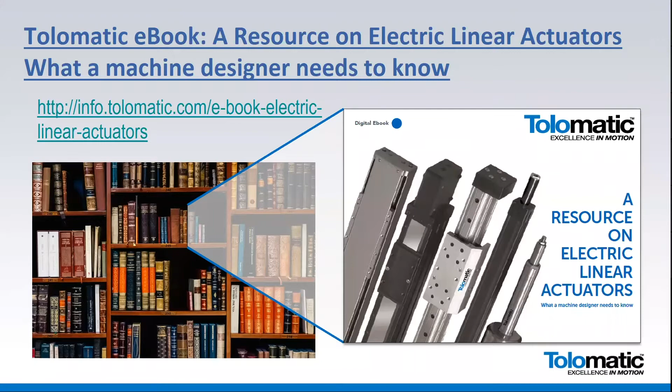Go to the next slide, Teresa, and I'll introduce Kenny Green. Kenny's been with us for a few years now, hailing from Colorado. Kenny, take us through selecting the right actuator.

Thank you, Andy. So part of the process of selecting the right actuator - one of the first steps you'll want to take is choosing between a rod style and a rodless actuator style. The main difference between these two is visualized in the pictures on the left. With the rod style, a rod comes out of the unit and goes in and out, kind of like a hydraulic cylinder.

With the rodless, it's a slide that slides along a piece of extrusion, kind of similar to a pneumatic slide. Some advantages of a rod style are that you get higher forces. They're designed specifically for pushing, pulling, or pressing applications, and you can typically get a higher ingress rating on them than with the rodless style.

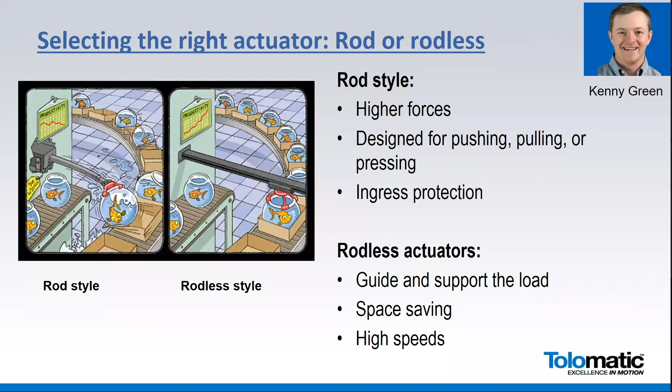So we'll go over some key design differences. Pictured on the right are the three different styles. The first top picture is a standard rod style actuator design. It has a single bearing support for the screw on the back side. There's a bushing on the front that helps guide the thrust rod, and the nut is directly coupled to the thrust rod of the unit.

The thrust rod extends and retracts. This allows for a high force application because that thrust rod is directly in line with the screw and nut, so you're able to put a lot of force on there. And you can have the motor mounted - in this picture it's mounted reverse parallel with a belt drive to it, but you can also have the motor mounted directly behind it.

One thing about this design is it limits the stroke length you can use in the actuators. Our largest actuators go up to 64 inches of stroke. When you get out to that stroke length, your pushing forces are limited because the screw is not supported on the other side - you can get buckling load problems, and you're limited by the physical strength of the screw at longer lengths.

With the rodless design, there are two different types: screw drives and belt drives. The middle picture is one of our belt drive actuators, and the bottom picture is a screw drive. The main thing you'll notice is the shaft where it comes out for mounting to the motor. With the belt drive, it comes out to the side of the actuator unit. With the screw drive, it comes out directly in line with the actuator unit.

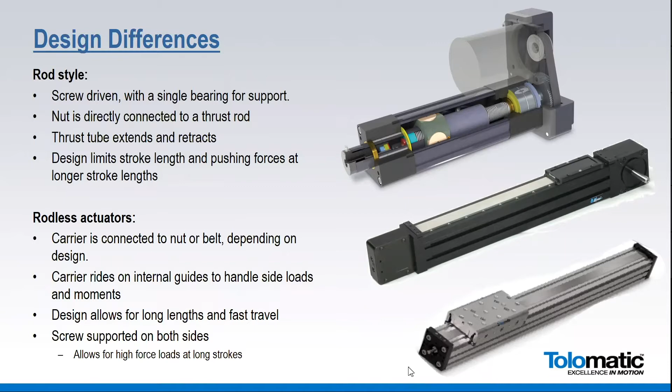So lastly, we'll go over some application examples. Here's a list of several different ones, just examples of this. But for rod style, classic examples are hydraulic replacement - so a hydraulic cylinder. These can be used in motion simulators, or a lot of times I see them used as pressing applications.

With the rodless, common examples are pneumatic slide replacements, where you're replacing a pneumatic slide system, or gantry systems. One particular example is pictured on the right, and this encompasses three of our rodless style actuators on the X and Y axes, and one of our rod style RSA actuators on the Z axis. This is a common setup and allows you to operate gantry systems effectively without having to put in external guides for them.

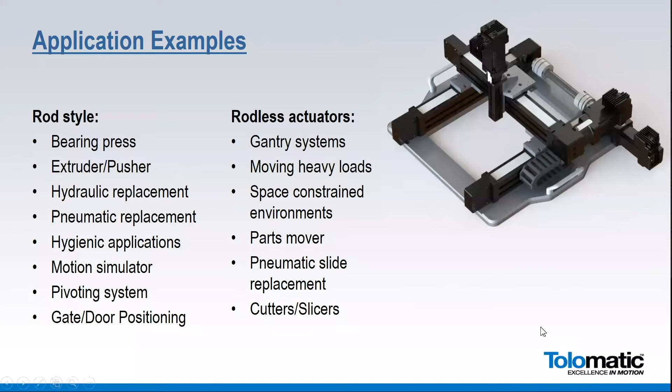Now we'll go into chapter 5 in our ebook here, which is 10 tips for specifying electric rod style actuators. And Jeff Brandt, our application engineer, been with us about a year, coming from a combination of California and Minnesota. So turn it over to you, Jeff.

Thank you, Andy. This section of the book, we like to call 10 tips for specifying your actuator. I think you can look at this as more of a checklist to make sure you're covering everything you might need when you're starting to size your actuator.

For the interest of time today, and also to help you remember this, I like to separate these 10 tips into 3 smaller categories: calculations, then maybe take your actuator out on a date, get to know what it's capable of, get to know a little bit of the background and see if it'll be a good match for you and your system. And then lastly, take a look at some of the environmental aspects. Especially right now, everybody likes to save the environment, and I think it's on the top of our minds, and it should be also for you when you're selecting your actuator.

So we'll take a closer look here at the math portion of this. This should detail tips 1 through 4 here. Most importantly, out of this section, I would really emphasize calculating for electric and not another form of power, so not hydraulic or pneumatic.

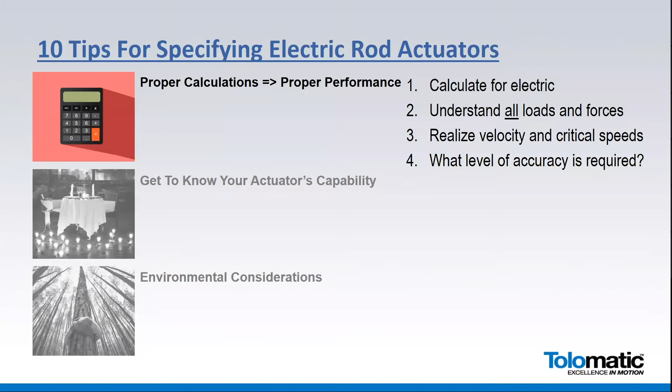If we go down to getting to know your actuator's capability, a big one I like to hit on is factoring in the duty cycle. You want to make sure your application fits what that actuator is designed for. So whether you have a lane diverter on a conveyor belt, or a kickoff on the conveyor belt system, and you're running 2 times a minute or even 4 times a minute, that's going to be very different.

That might be more towards the 100% duty cycle range. That'll be different than perhaps raising and lowering a table for testing, where you might do that once or twice a day. Now, all of our actuators are designed to be 100% duty cycle, but that doesn't mean they won't work in that 25% duty cycle range. It just might mean, reverting back to the first section, we want to make sure we're not giving you more than you need.

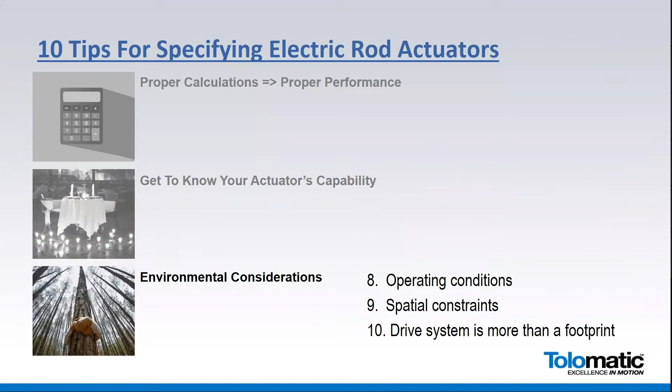Lastly, for that last chunk on the environmental considerations, the biggest one is also the operating conditions. Whether there's a larger amount of dust particles in the air, sawdust, or any water spray, anything like that is really going to affect which actuator would be the right fit for you.

We have certain actuators that are designed for those environments, and if you have a bit of a harsher environment and you're not quite sure where to go, feel free to reach out to us. We'd be happy to guide you in the correct direction to make sure you're going to get an actuator that fits your needs.

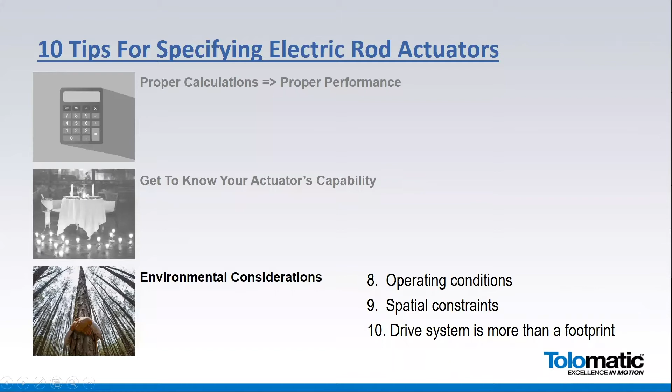And you might start to think, okay, holy smokes, this is a lot for me to keep track of as I'm starting to size my actuator.

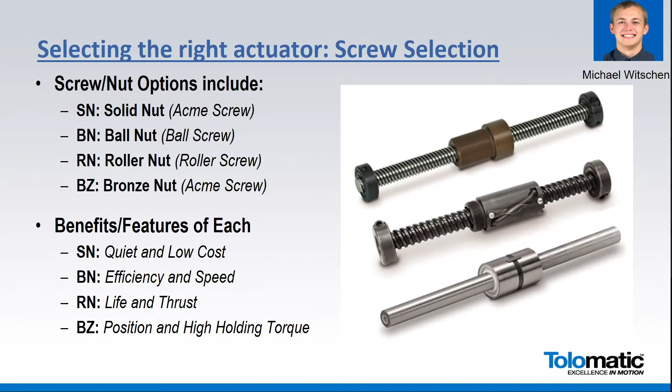That's going to be really great for pressing applications, kind of that repeated hitting the same point with high force every time. That gives you an increased life estimate, but we also need to be careful of the heat that's being generated there. That's one thing that Jeff mentioned too, that duty cycle piece. So knowing the worst case scenario for all of these applications is going to give us the best, most accurate life estimate we can provide.

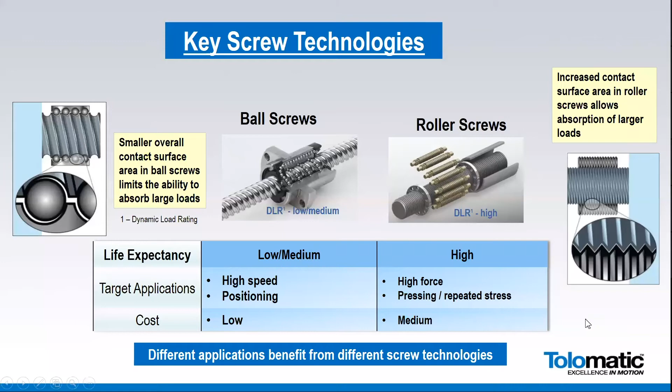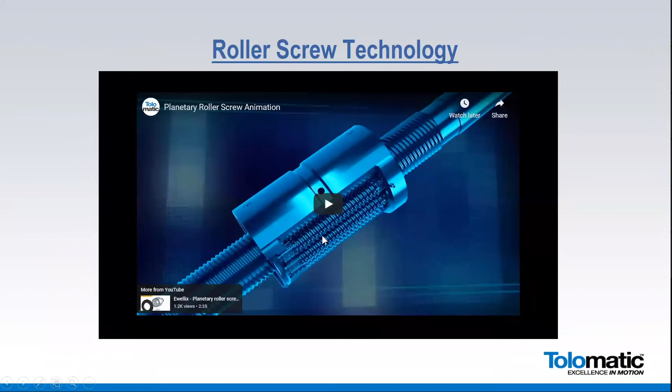Now we actually have a video here too that kind of shows the inner machinations of that roller screw. So we're going to click on that and let you guys have a close and personal viewing of that. These are available on our website as well.

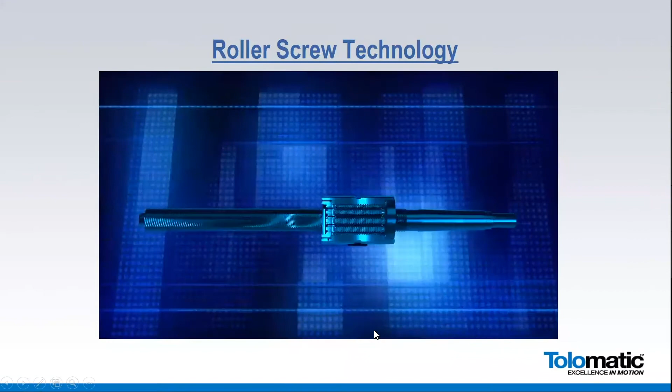You can find these videos on our Tolomatic YouTube channel as well. They have fun music that goes along with it, which doesn't translate as well in the Zoom meeting here. I wasn't sure exactly how the sound was going to play through, but you definitely can dance along if you want to later on.

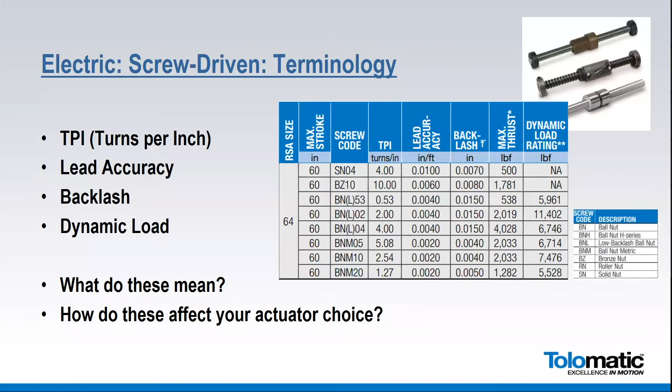Thank you very much, Michael, appreciate it, a lot to learn about screw technology. One of the questions everyone has is, how much work can it do and how long is it going to last? So Nathan Anderson, application engineer, been with us about a year, is going to take you through some of the key things we can calculate for you and give you a fair estimate on life expectancy as it relates to ball screws and roller screws.

Thanks, Andy. When selecting an actuator, life is a very important consideration you want to take into account. Oftentimes we can oversize actuators to provide longer lasting solutions. So there are multiple routes you can take in choosing an actuator for your application, not only just choosing what would be most cost effective.

We do have an ebook and a pamphlet on life, which has more information in it if you want to dig a little deeper, but we're not going to touch on everything in there in this presentation. The 4 things we're going to touch on are the B10 to L10 estimates, load factors, variables to consider, and then PV limits for solid nuts and Acme screws.

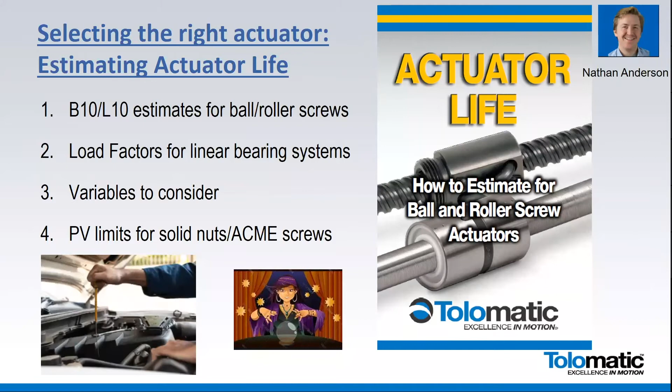It's important to note that your actuator, like a car or any other mechanical assembly, will last longer if you take care of it. Some of our actuators require regreasing, some don't, for example. It's also important to note that these are estimates, because we cannot predict the future, and they're not a guarantee of life.

So, ways to estimate life. Our L10, B10 is a calculation of a life at which 10% of the bearings in the application can be expected to have failed due to classic fatigue failure. So 90% will still be operating at this travel distance. It's equal to the dynamic load rating, which Michael touched on, over the equivalent load.

If your load is constant, you can just put that number in here. If it varies over the stroke, then there's an equation that averages the loads given the proportion that they are represented per the total stroke. That's in the pamphlet, as you can see it's a cubic function. So small changes in the DLR, or dynamic load rating, of the screw can change the estimated life pretty significantly. And this is all multiplied by the lead.

That's it for ball and roller screws. For linear bearing systems seen on our rodless actuators, we have an L10 of 5 million linear meters of travel, given the load factor does not exceed 1, and noting that this varies on operating conditions, combined loads, etc. So it's important to look through the catalog of the actuator you're looking to use and the life estimates we can give for those actuators.

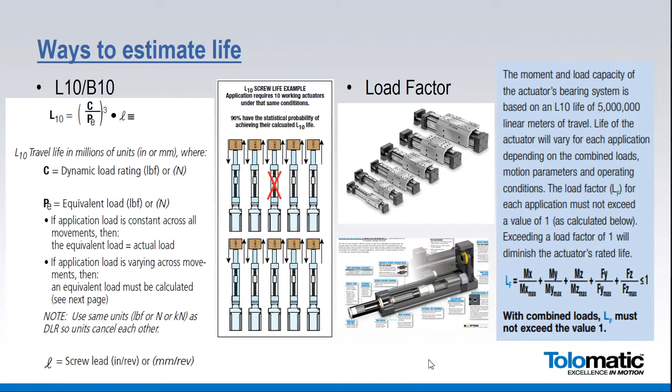So there are limitations on estimating life. We cannot compensate for all the variables that affect life of an actuator. If ingress of a corrosive chemical occurs, for example, that's going to limit life. If the grease liquefies and doesn't lubricate properly, that's also going to limit life.

I have also included a picture of our MXB series actuators below those variables because we do not provide belt estimates or lifetime estimates of our belts, which people normally have questions about. Due to the number of variables that affect belt life, we just can't accurately estimate how long they're going to last.

And the fourth thing we're going to touch on are solid nuts and Acme screws, and the PV limits for those.

This is another key screw technology we have at Tolomatic. The PV limit is a function of pressure and velocity, which is where the P and V come from. It's a thermal consideration, as heat buildup is a function of these two variables. We cannot provide life estimates for these nuts due to uneven wear and inconsistent thermal impacts on the Acme nuts or the solid nuts. So the only guidance we can provide on life is sizing under the PV limit for the actuator.

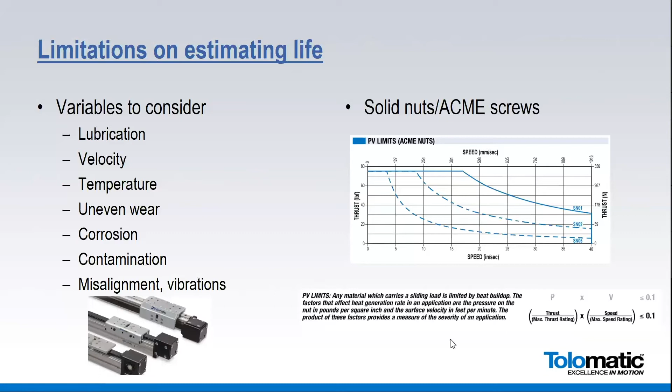Great, thank you Nathan. So a lot of technology there. We've gone through 4 chapters we're going to highlight. We've got 2 left. There's a lot involved here as we're skipping around, but there's a lot of knowledge we were able to share here, but also a teaser of other things you can check out on your own, or as Nathan just pointed out, we welcome you to reach out.

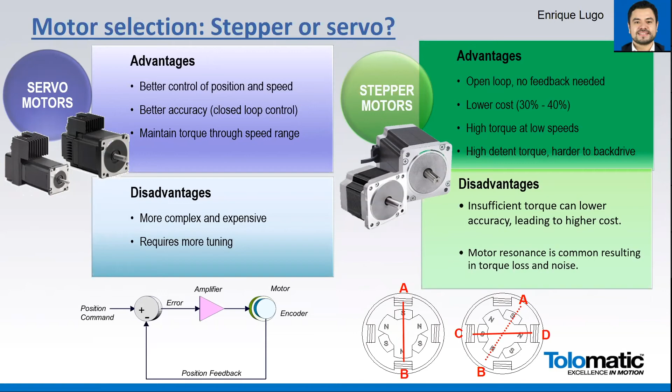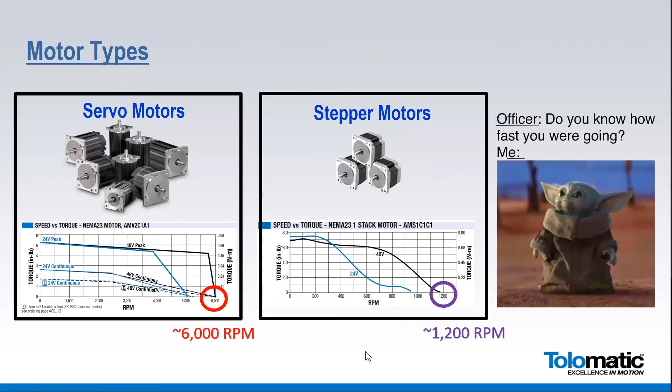And also it'll let you reduce your costs. Both in the selection of the motor, it will be 30 to 40% less expensive. And also you probably don't need an encoder to provide you with feedback. So you save money if your application is slow enough.

Next slide, please. So what determines, another click, please, what determines the speed of a motor?

Typically, the voltage in our drives goes from 10 to 60 volts, and that voltage is used to reach different speeds. With 24 volts, you'll be able to reach less speed than with 48 volts. It's the same case both in servo motors and stepper motors.

We call this a higher voltage, 48 VDC, but in reality it's not high for some motors out there in the marketplace. We offer motors that go up to 460 volts VAC, which we don't have a drive for, but we do offer motors with higher voltage. For our drives and motor systems, we offer up to 60 VDC. So to conclude, the higher the voltage, the higher RPMs you can reach.

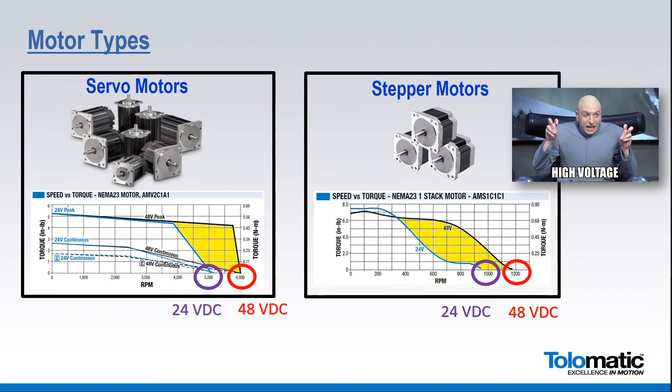Another thing people use to generate more torque are gearboxes. What happens is you take the speed you have in the motor and connect that shaft directly to the back of these gearboxes, and that high rotational speed of the motor translates to a slower rate at the output shaft of the gearhead, but with more torque. So you can have reductions such as 3 to 1, 5 to 1, 10 to 1, etc. All those reductions mean your motor will rotate 3 times faster, but at the output shaft of the gearbox, it'll generate 3 times more torque.

So it's a balance between how much speed you can achieve with a motor against how much torque you need to develop. There's software out there that will calculate this for you, such as motion analyzers. We also have our internal sizing software available on our tolomatic.com website that will calculate this for you. It's free to join, you just set up a new account, and you can start plugging in numbers for your application requirements.

We offer gearboxes like these, but if we don't have it, we can get it for you in the ratios you need, or we can design the actuator to accept either the gearbox or motor you want from a third-party company.

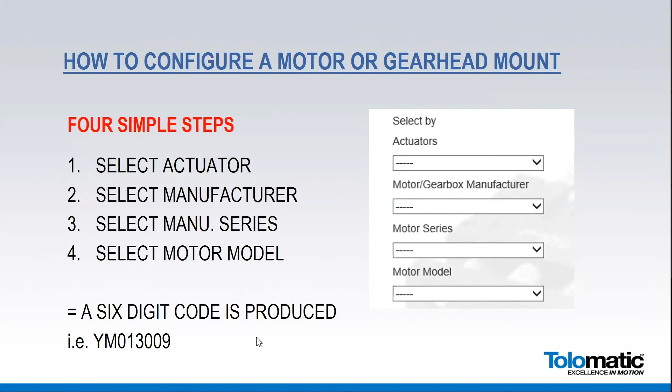Once we have a code, we can go to our next step, which is to verify these program dimensions with your catalog dimensions. It'll list all the pertinent dimensions you'd suspect, like shaft diameter and length, mounting bolt circle, and pilot diameter, which actually aligns the motor.

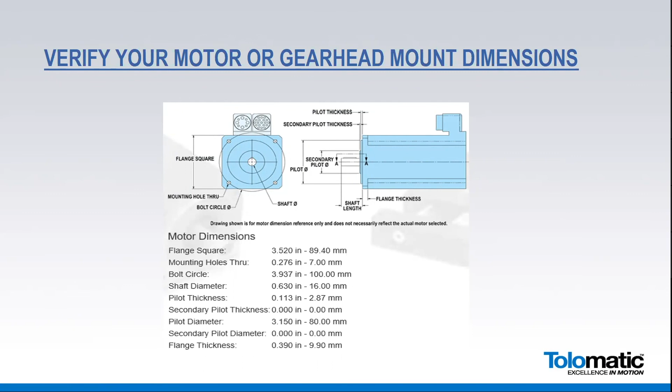Once we have a verification that our dimensions are correct, our next step is to put this motor mount on the actuator and then put that into our design. So we can go back to our website, to our CAD library, download a 2D or 3D model, and that can verify fitment of the entire actuator.